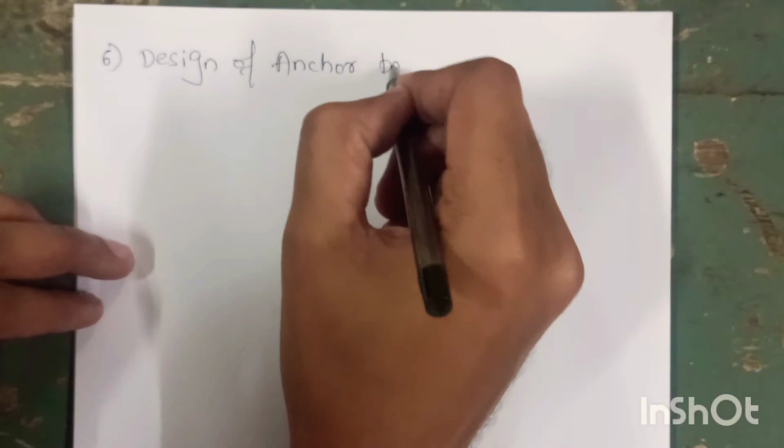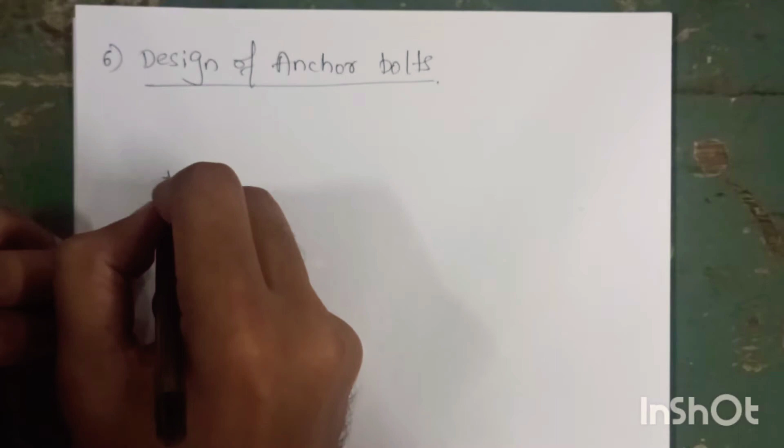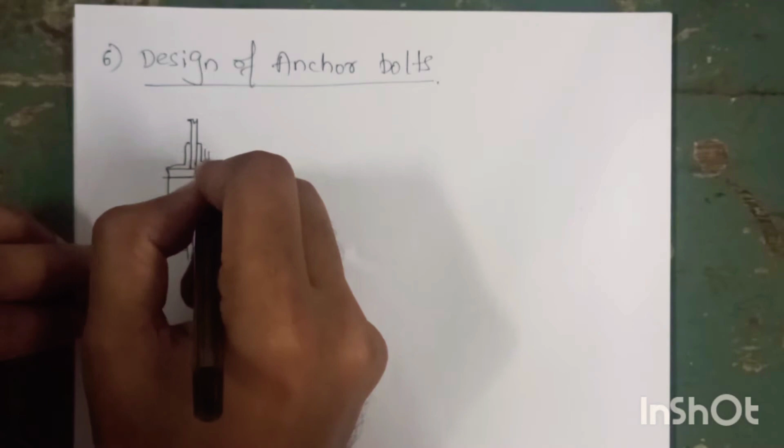So next is design of anchor bolts. Now anchor bolts will give the connection between your truss element and the concrete pedestal.

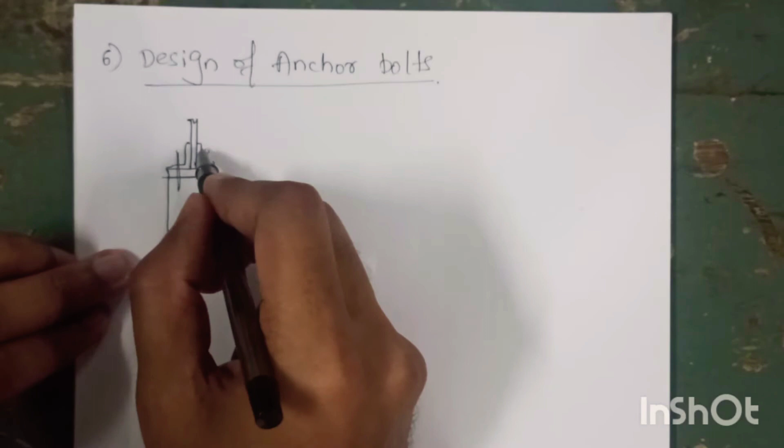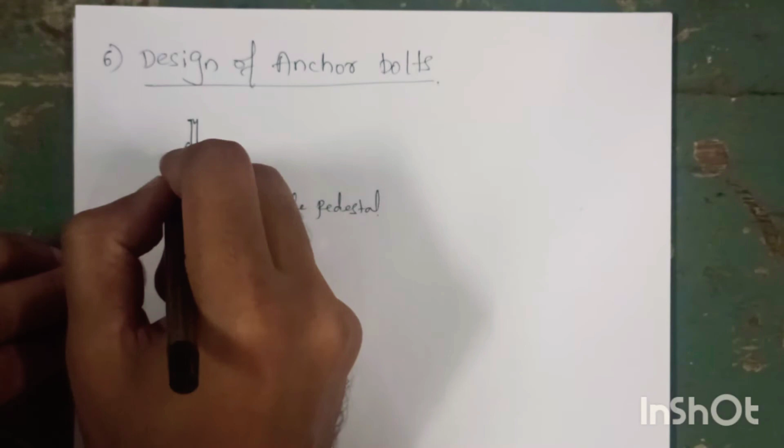The support reaction, the base plate and shoe angles we have designed for the truss, and the concrete pedestal. Now your anchor bolts will be designed for the uplift force. If there is any shear force also, your anchor bolts have to be checked for shear force.

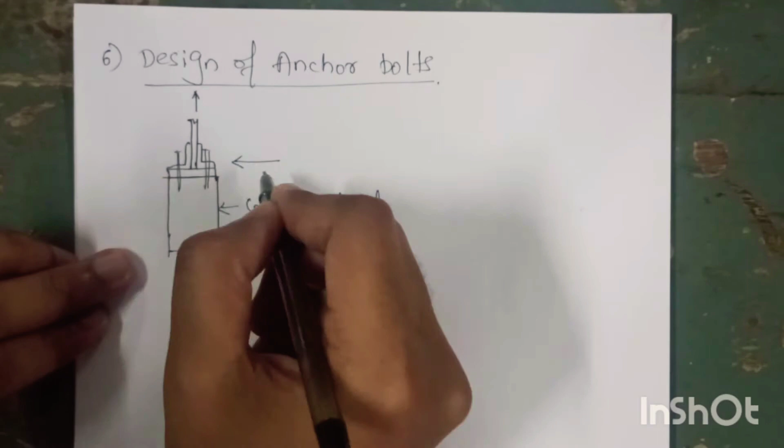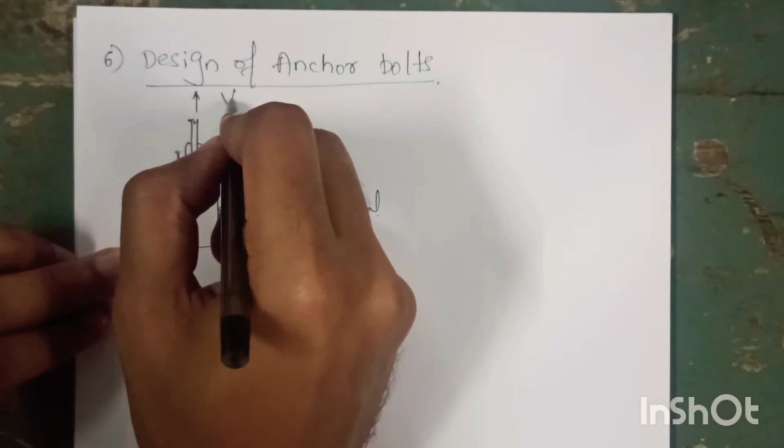In this case, there is no shear force. Your bolts also will not be subjected to any shearing force. It will be subjected to only the uplift force, which is given as 15 kilo Newton. The total uplift force of the entire truss.

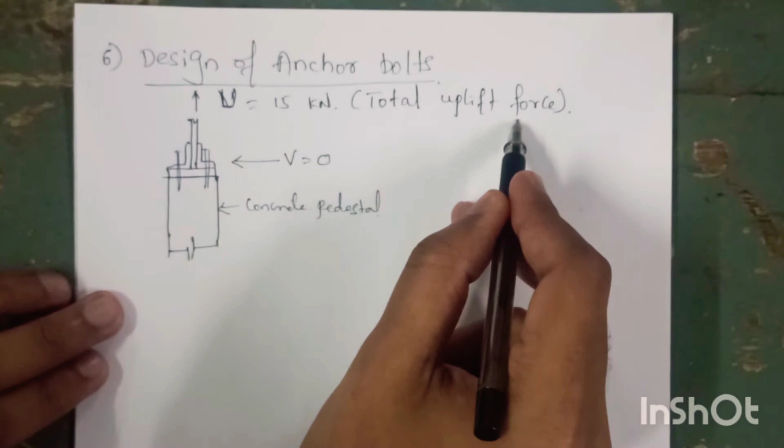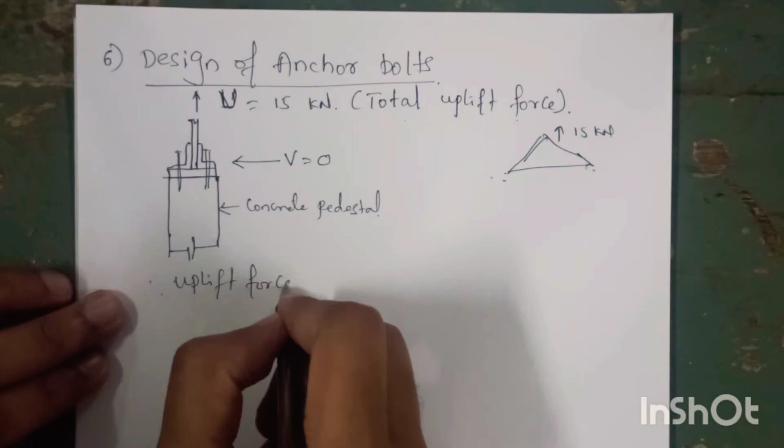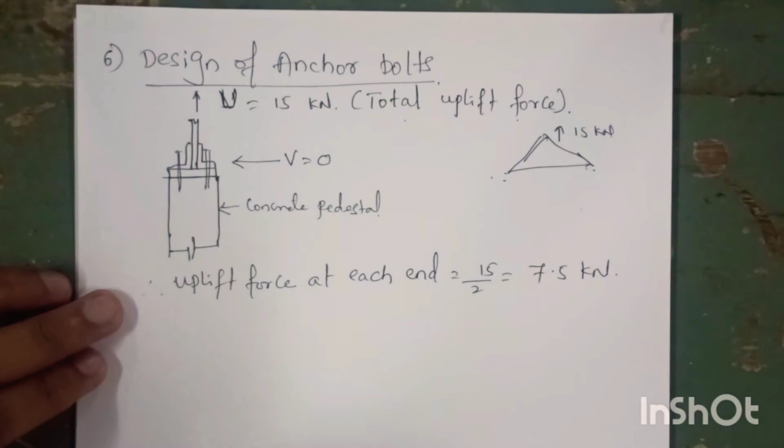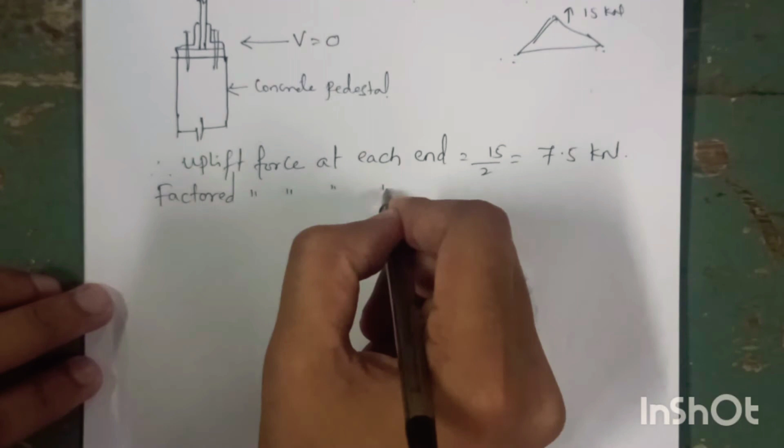So now this total uplift force will be divided at both the ends of the truss. The total uplift force of 15 kilonewton will be divided equally at both the ends. Therefore uplift force at each end will be 15 divided by 2, which is 7.5 kilo Newton. Now calculating the factored uplift force at each end will be 7.5 into 1.5, which will be 11.25 kilo Newton.

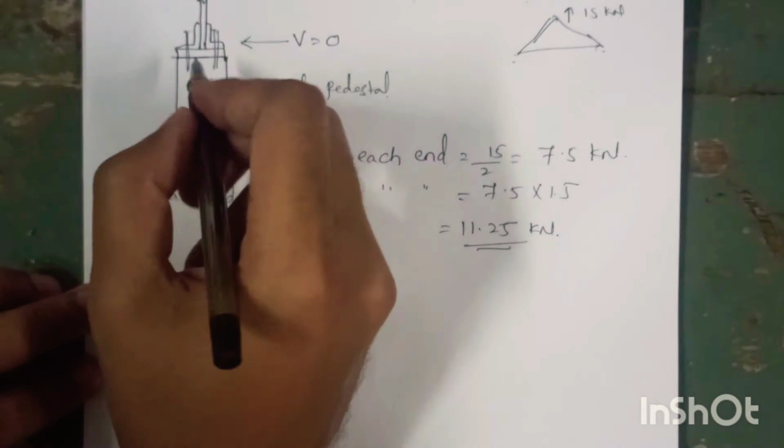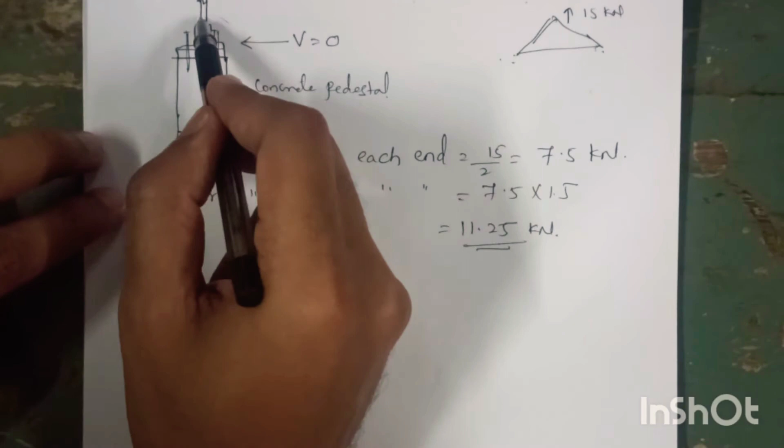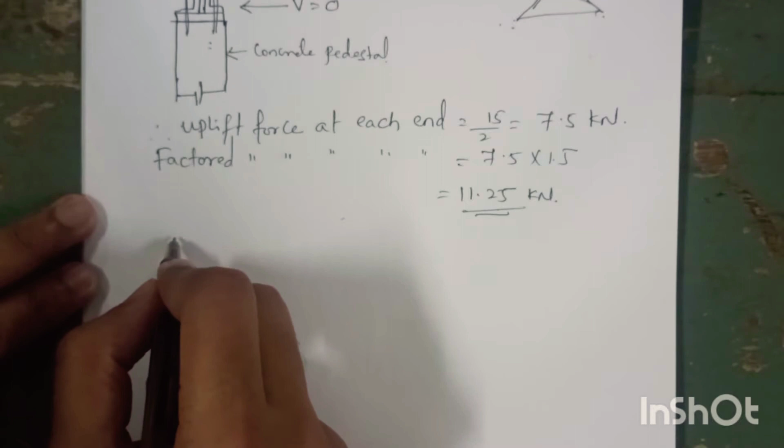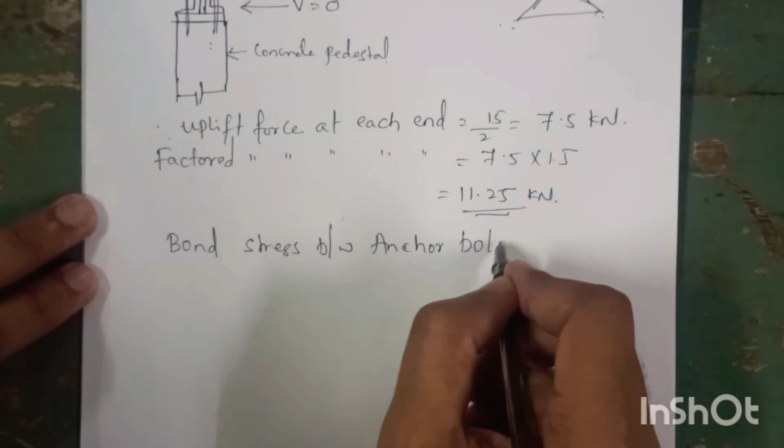Now this uplift force should be held down by these anchor bolts embedded in the concrete pedestal. That is, the bond stress between the anchor bolts and the concrete pedestal will hold down the entire system in the concrete pedestal. Okay. So now considering the bond stress between anchor bolts and concrete, which is 1.2 Newton per square mm.

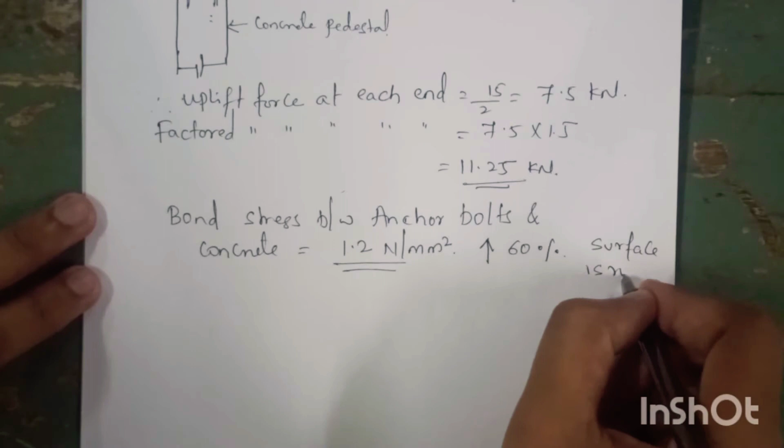Now as per code, it says this value can be increased by 60% if the anchor bolt's surface is rough. So therefore the bond stress, say tau BD, I'll call it as 1.2 into 1.6, which is roughly say 1.92 Newton per square mm. Now this is the bond stress between anchor bolts and the concrete.

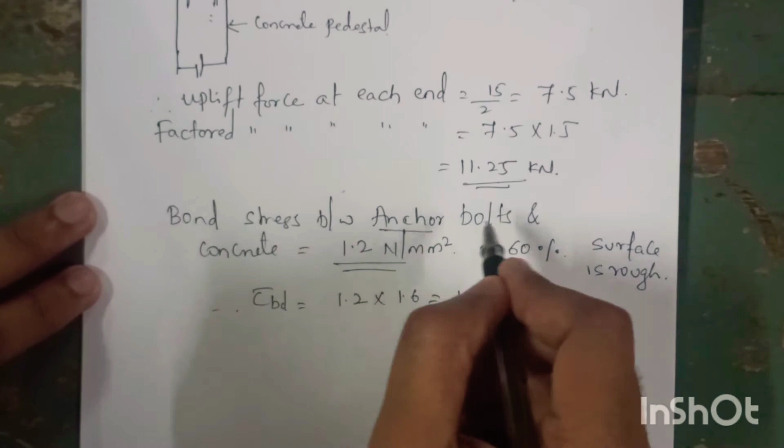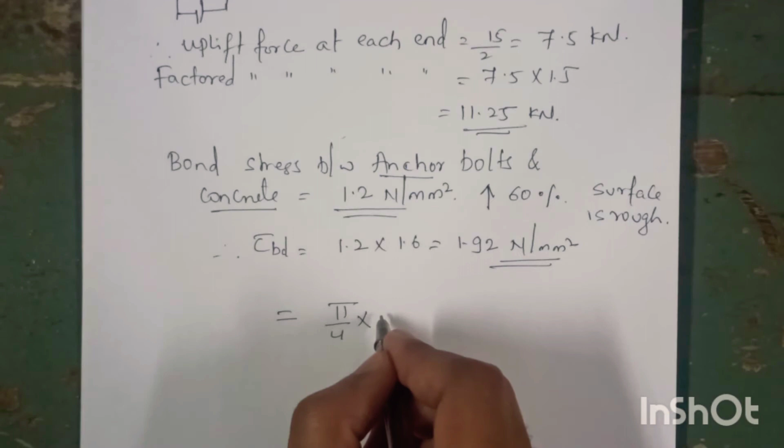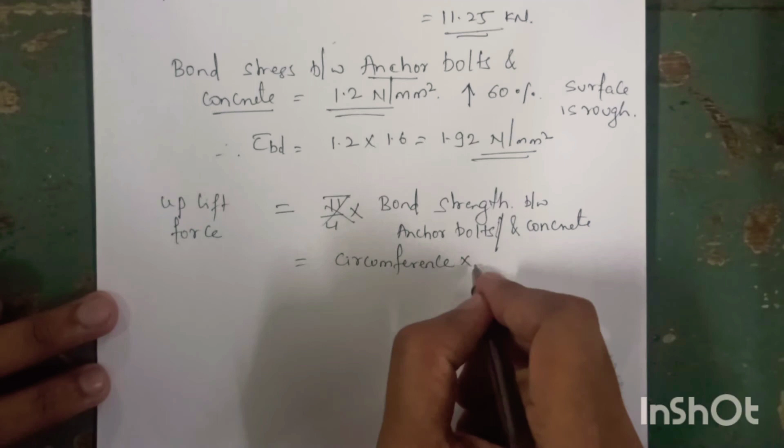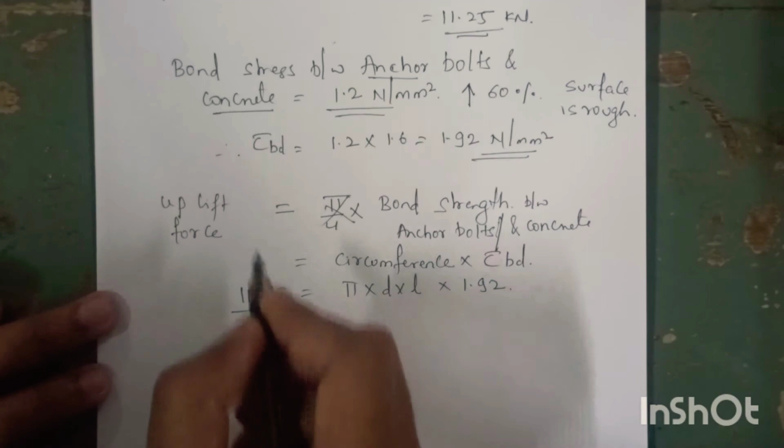So now the bond strength is calculated. The total uplift force should be equal to the bond strength between anchor bolts and concrete, which is calculated as circumference into the permissible bond strength, that is tau BD. The circumference is calculated as pi into D into L into 1.92, which will be equated to 11.25. So now this whole will be divided by 2 because we are providing 2 anchor bolts.

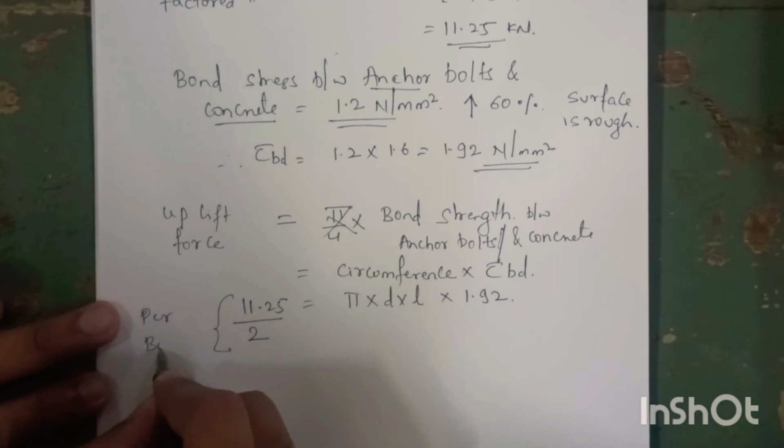That is why the load will be equally distributed between both the bolts. The total load coming per side is 11.25. Then per bolt, if you are planning to provide 2 bolts, the load coming on each bolt will be 11.25 divided by 2. This is per bolt. Okay. So now pi into diameter of the bolt, say we will assume it as 18 mm. Dia of anchor bolt is say 18 mm.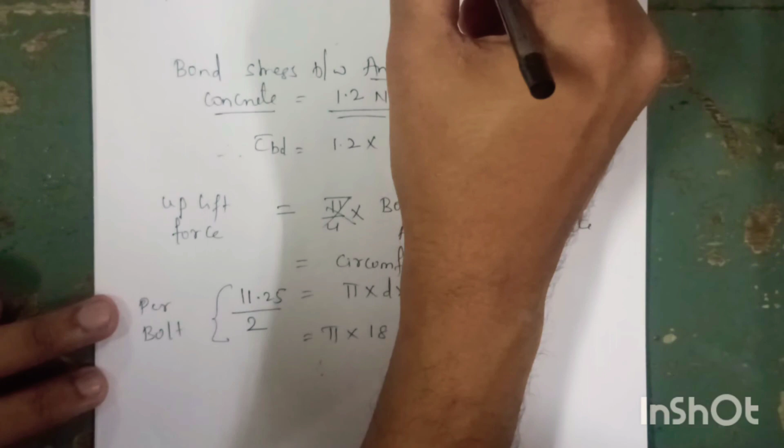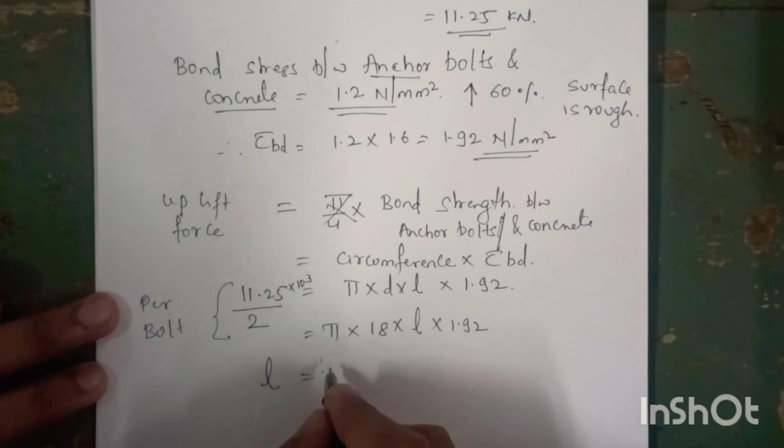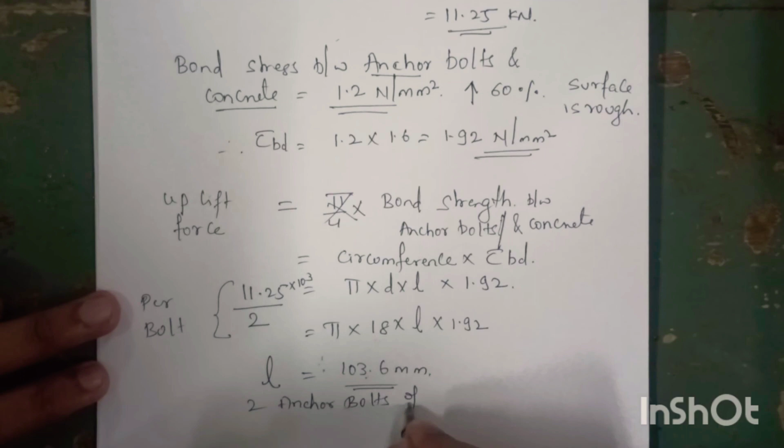L has to be calculated into 1.92, and this has to be multiplied by 10 to the power 3 to convert it into Newton. So now finally we will be getting L, which is 103.6 mm. So now we have to provide 2 anchor bolts of 18 mm dia of length equal to 110 mm. So this 110 is the length of anchor bolts that should be embedded in the concrete.